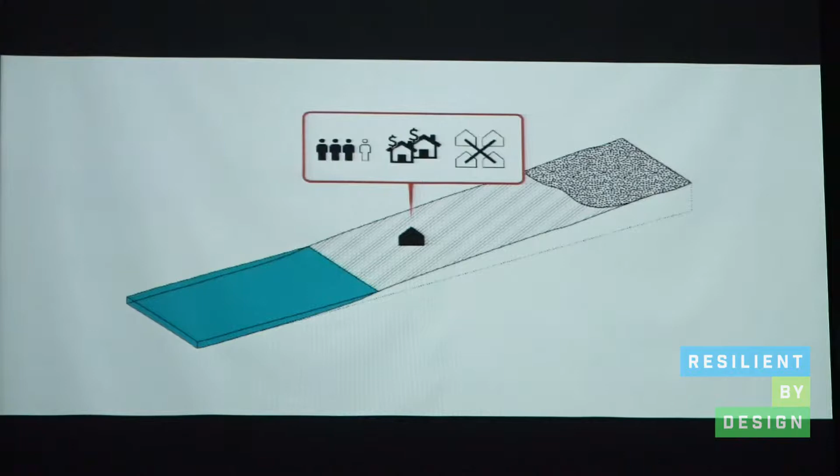The Bay Area is in crisis. When large groups of our neighbors can't afford to live in their homes, then the model for living in the Bay is broken for all of us. Many of our most vulnerable communities, those enduring poverty and structural racism, also live in areas that are highly susceptible to sea level rise and flooding.

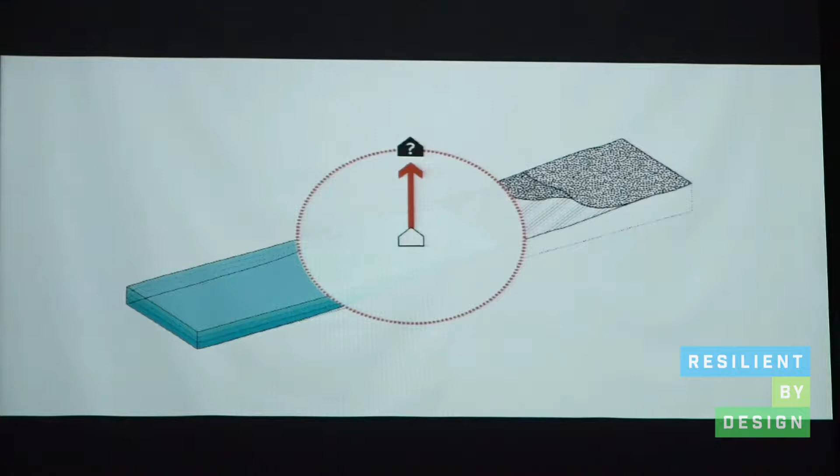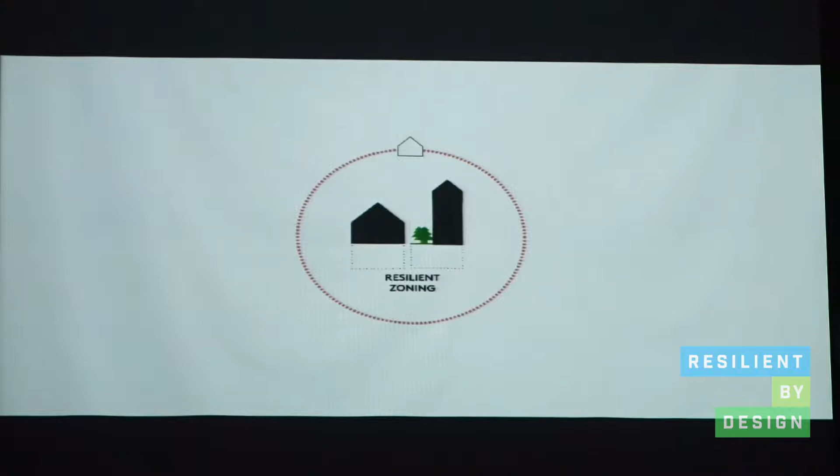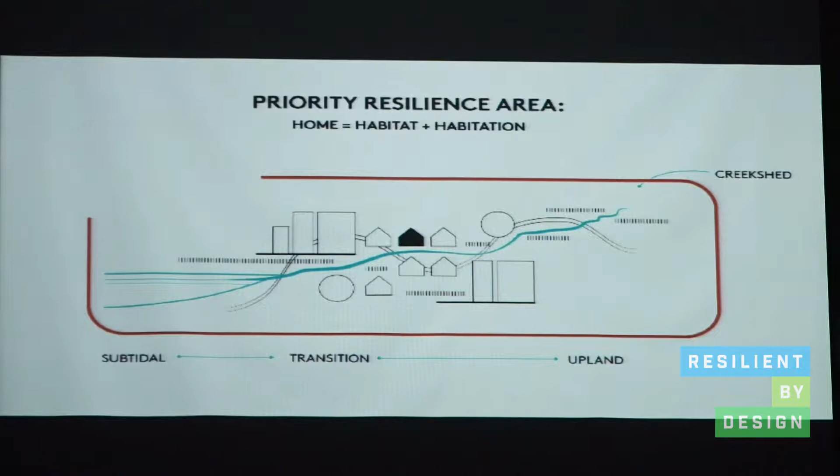We need solutions that allow neighborhoods to remain in place and thrive. We must produce more housing, preserve low-income housing, and protect residents from displacement, while improving the quality of neighborhoods for everyone. The home team proposes the creation of priority resilience areas, where new ideas of home emerge from a healthy and dynamic bay ecosystem. New regional patterns along the Bay Edge intertwine the health of the Bay and the health of our neighbors.

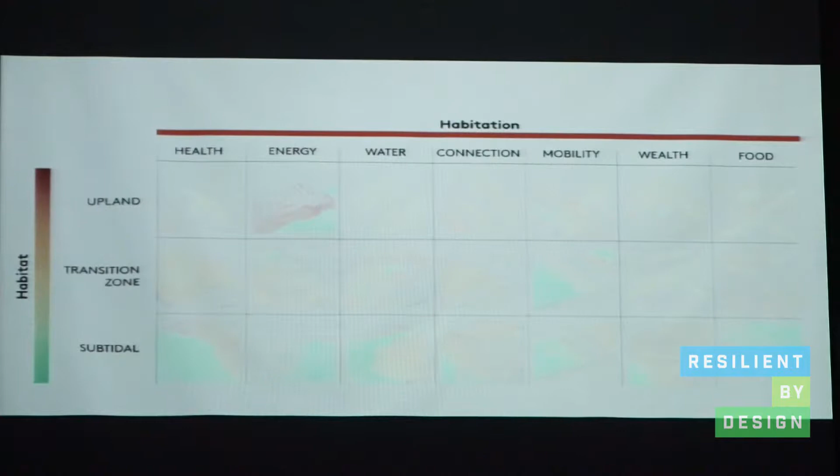Working in partnership with community members, we will use design as research to take on challenges and create opportunities for communities to relate, adapt, and thrive.

North Richmond is a place of historic racial inequity. African Americans who arrived in the Bay for the World War II shipbuilding effort were forced to settle in the low-lying area, cut off from other communities by railroads and infrastructure.

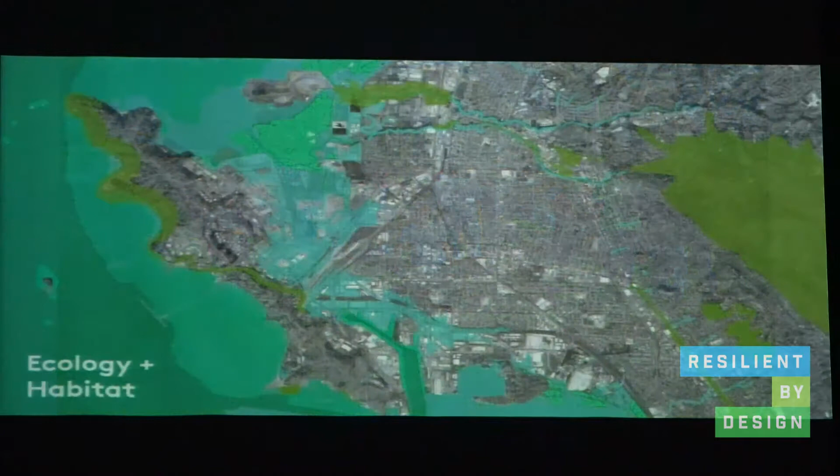The community is well organized, developing a North Richmond vision plan, programs at the Verde School, and greening projects with Urban Tilth. Green infrastructure and floating trails can address flooding while enhancing quality of life.

By improving walkability and bikeability to BART and the ferry terminal, residents can reduce commute times to re-engage with Bay nature at Point Molate as part of a daily routine. Horizontal levees and improvements to wastewater infrastructure open up opportunities to build new, permanently affordable housing.

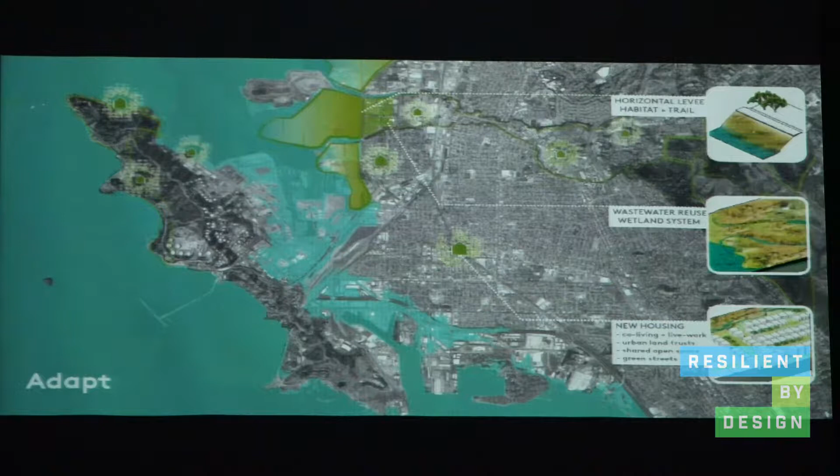The community and the ecosystem will thrive, catalyzed by an urban ecology business incubator that is a source of jobs, innovative housing, and a clean energy park on the site of the former landfill.

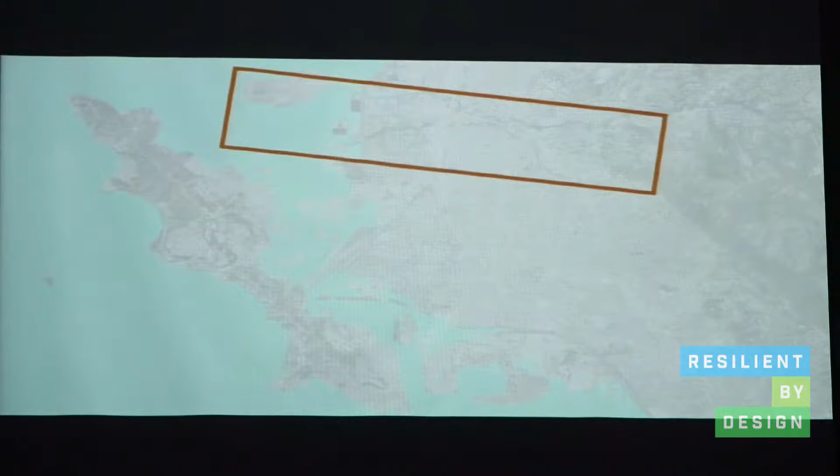In the near term, the North Richmond Water Reclamation Plant can provide treatment with constructed wetlands, allowing for pocket marsh connections that are healthier for the Bay Edge. As waters rise, the constructed wetlands transition to salt marshes to augment the Bay's estuarine habitat.

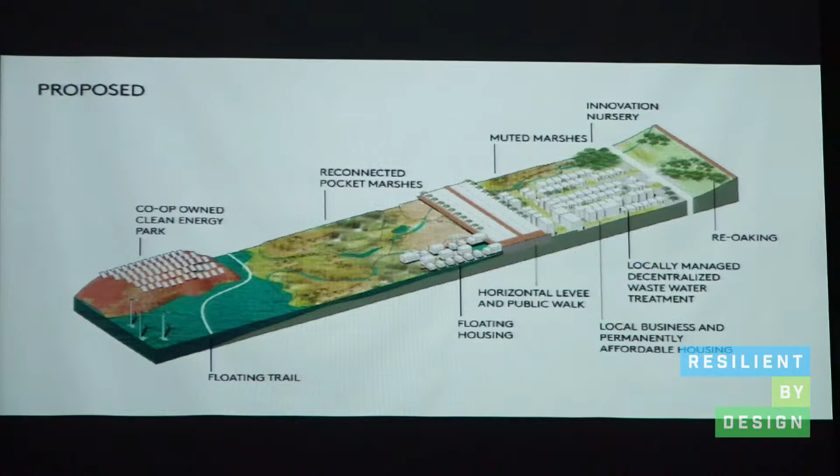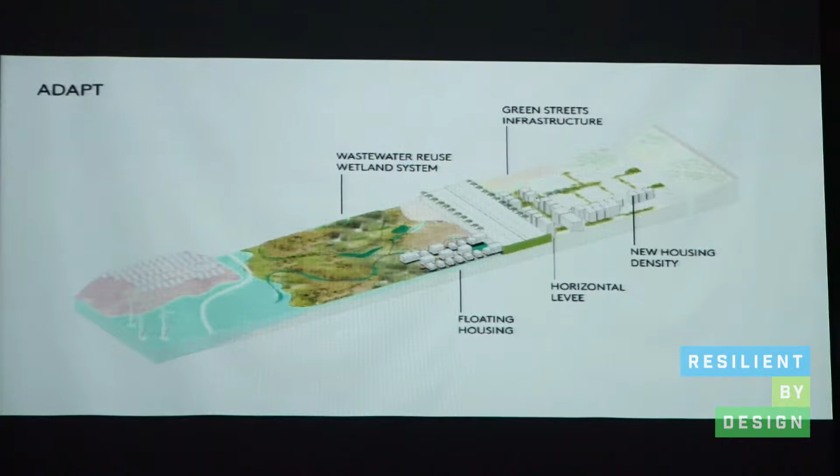Looking 20 years out, decentralized wastewater systems can be located in each neighborhood. These wastewater systems look like greenhouses open to the public. They can also process increased nutrients and return clean water to the Bay. As infrastructure is relocated to inland conditions, the waterfront is freed up for new floating housing and ecological restoration.

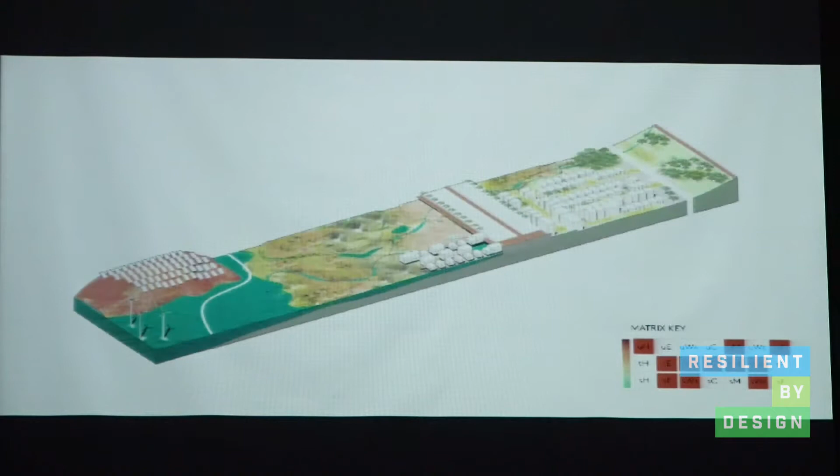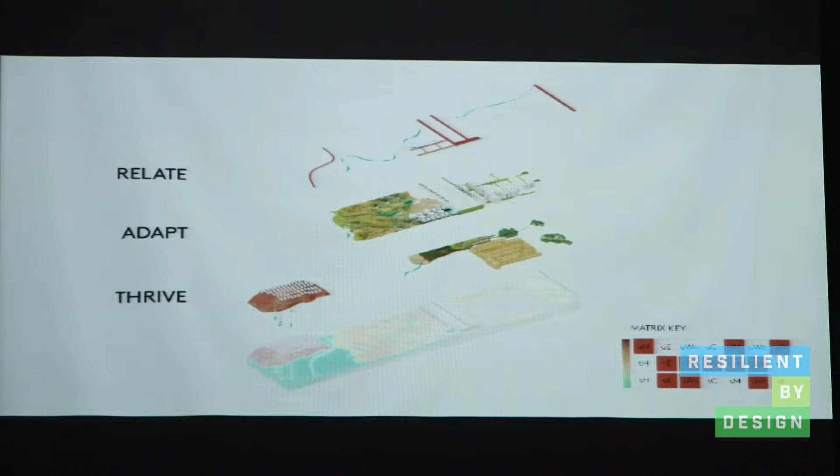Students from Kennedy High School in Richmond have shared visions of healthy food, floating homes, rooftop gardens, and multimodal transport. Stacking funding sources for ecology, wastewater, and health can support this neighborhood transformation, a priority resilience area in North Richmond.

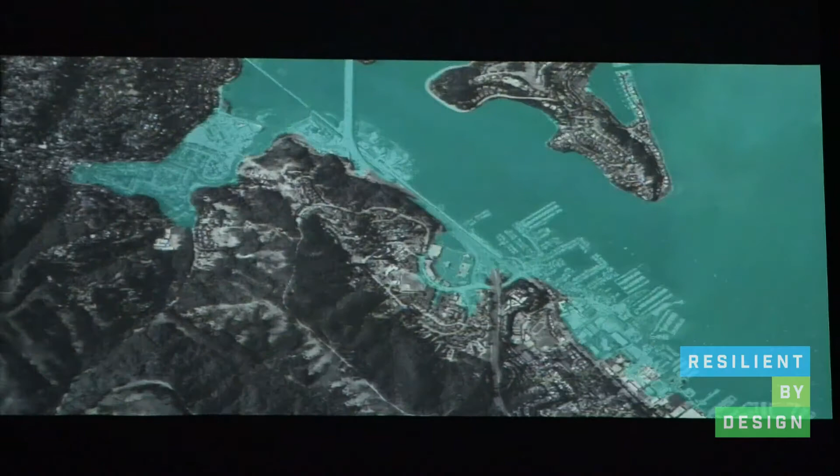Marin City residents are well organized and tight-knit, yet constant flooding and deep health disparity highlight inequity within one of the nation's most affluent counties.

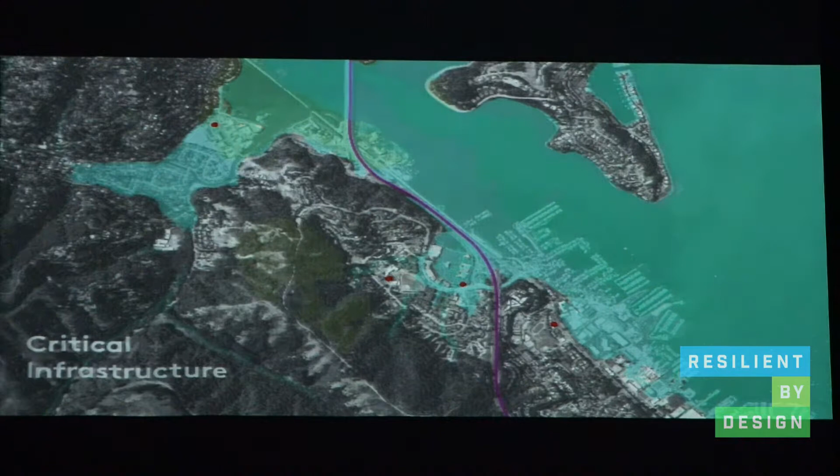Improvements to Highway 101 can mitigate its regular flooding and catalyze positive change in Marin City. However, it is essential that the existing residents not be displaced. People here have experience with things not working out in their favor. New economic models need to come first for producing, protecting, and preserving housing.

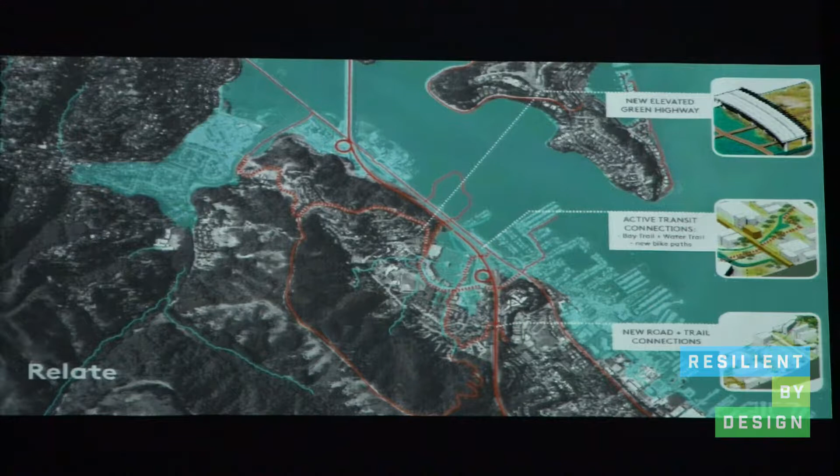We propose elevating the low-lying portion of Highway 101 to provide a critical second access point to Marin City. A new horizontal levee and marsh areas will adapt to rising water while supporting new affordable houseboat cooperatives. Proposed creek restoration and street retrofits with green infrastructure will help reduce upland flooding.

The community thrives as new housing and jobs come to Marin City, and a community reinvestment fund directs revenue to support projects with community benefit, such as an enhanced community center and a community-owned clean energy microgrid.

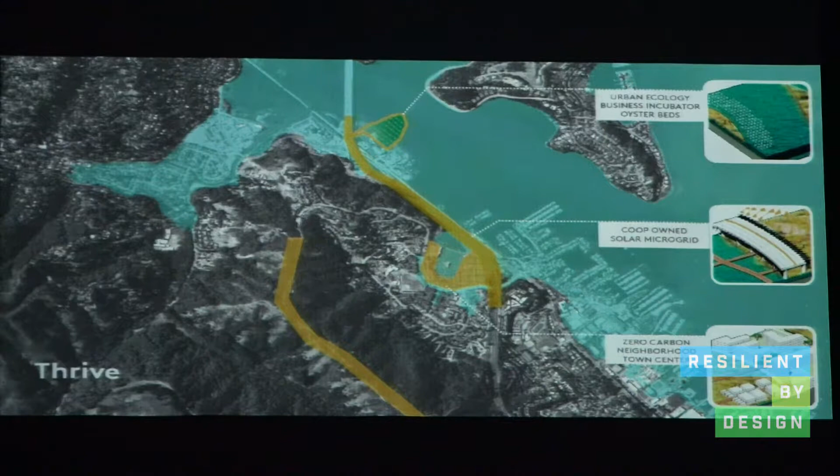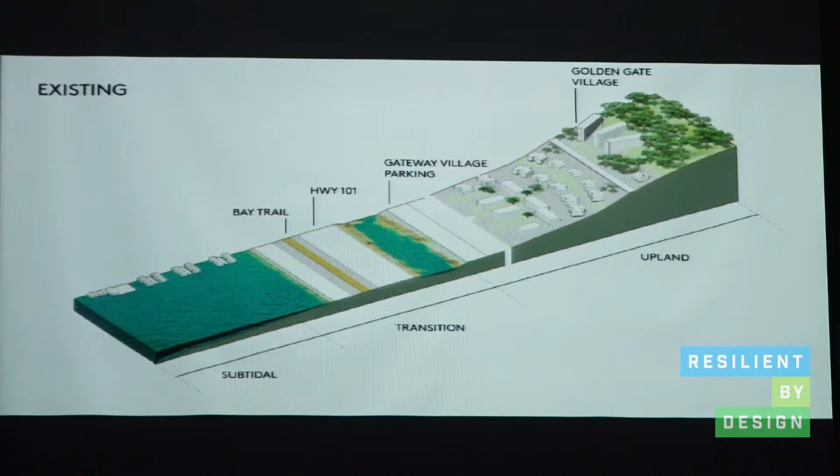In the short term, the highway median can be redesigned for flood control and provide an immediate response. A raised bay trail can be designed to be part of a new horizontal levee that phases into tidal marsh as sea level rises. In 20 years, an elevated Highway 101 and a reconfigured shoreline support development of a new mixed-use center.

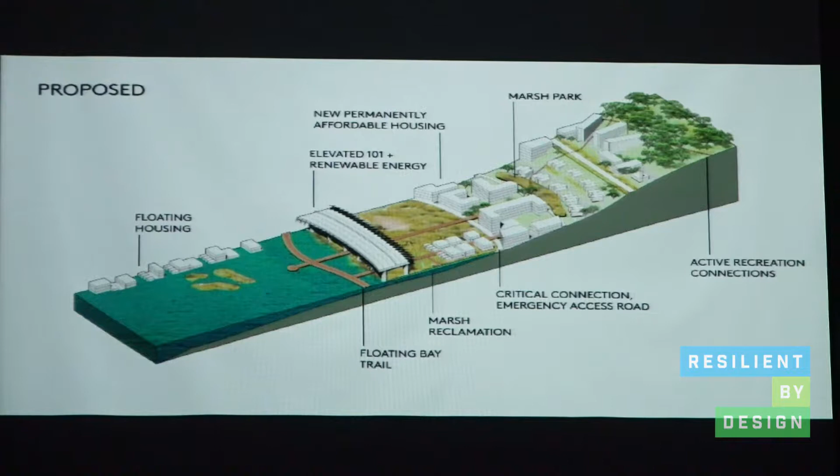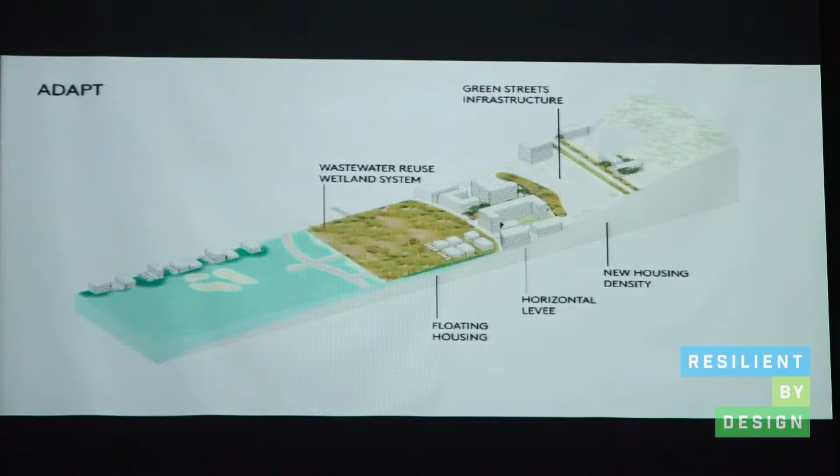This mixed-use center provides jobs, healthy food, and permanently supported affordable housing along a living shoreline, with houseboats and a new expanded tidal marsh. Residents, hikers, bikers, and tourists use new trails and floating bridges to move easily between Sausalito, Tam Valley, and Marin City.

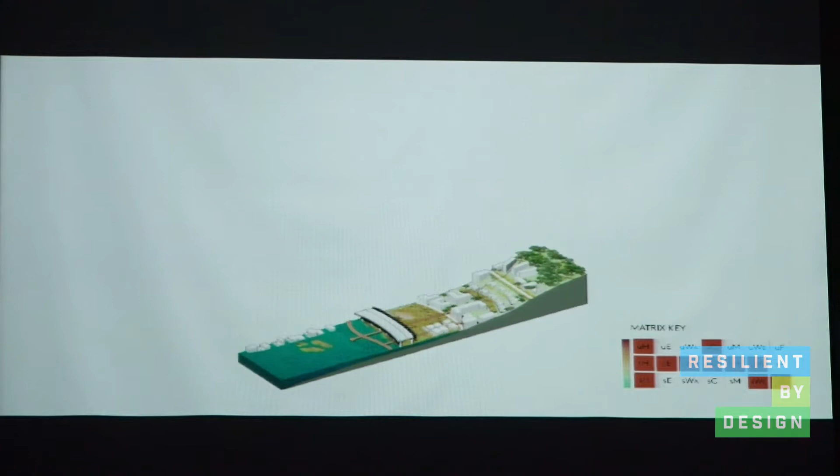Resilience investments are a catalyst that can include many co-benefits, such as space for a flea market every Saturday in a new floating town square in this priority resilience area in Marin City.

Neighborhoods in East Oakland have motivated community organizers with adopted master plans for San Leandro Creek and Arroyo Viejo and a strong citywide resilience plan.

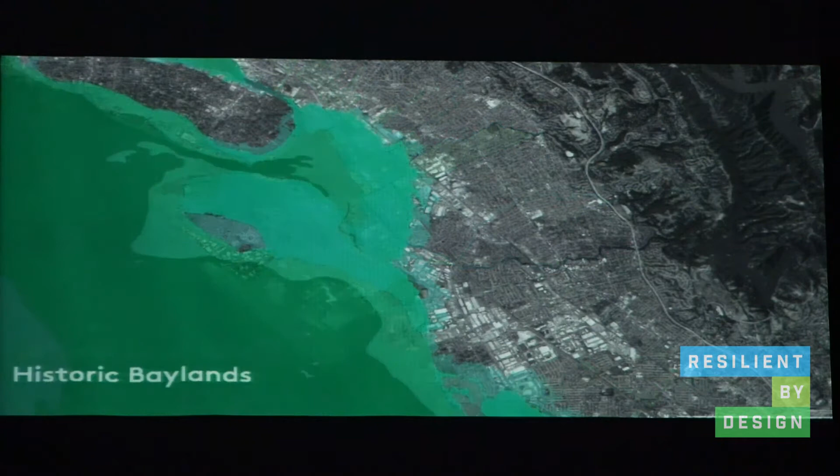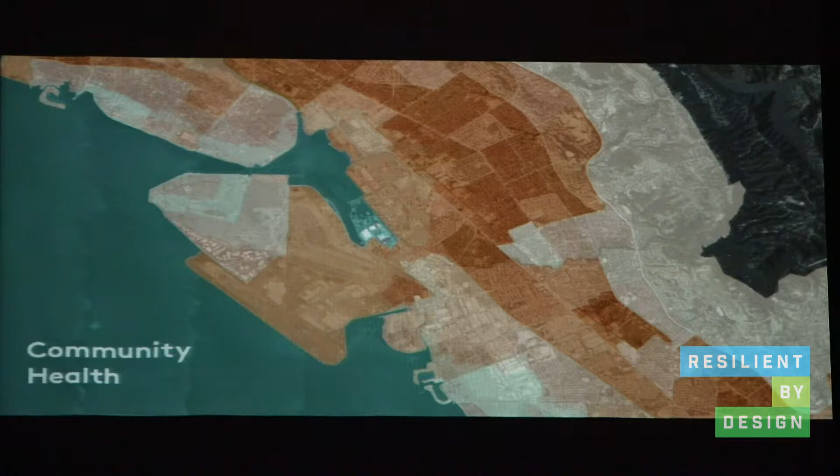But the challenges of racial inequity are clear. Between 2003 and 2013, a young black man in Oakland was as likely to be killed in gun violence as he was to be prepped for college. Our team is committed to a process that recognizes the urgency in that disparity.

When we walked Arrowhead Marsh with the community members, we heard that they would like to use the park more, but getting there was frustrating and unpleasant. Trails along the creeks can connect people to Lake Chabot and the Bay Area Ridge Trail along the new East Bay Greenway, making it easy to be healthy with places to walk, bike, or visit with family and friends.

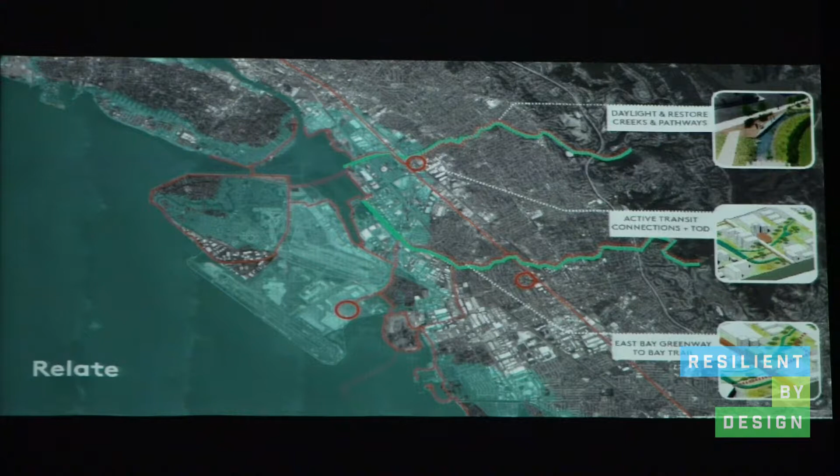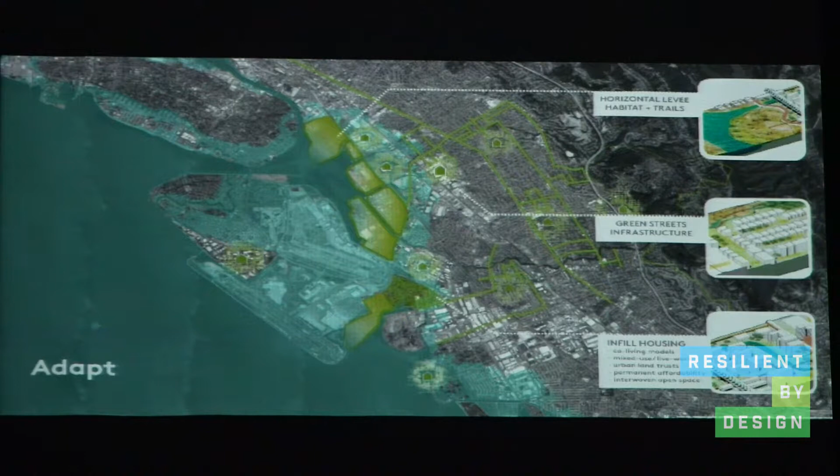Adaptation can occur as the Bay Edge is restored, with transfer of development rights and community land trusts supporting development of permanently affordable housing for a mix of incomes, including the missing middle, in mixed-use neighborhoods that include local jobs and access to healthy food.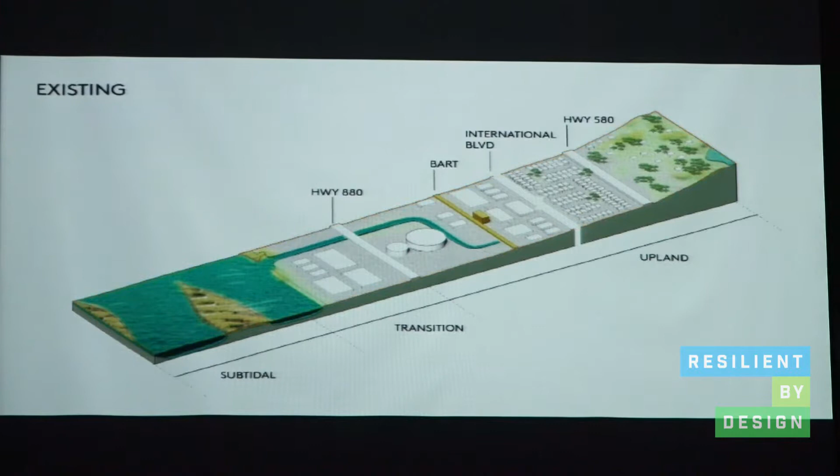A community-based clean energy microgrid, a decentralized wastewater system, and transit accessibility could contribute to more inclusive neighborhoods with shared wealth building. A 20-year vision includes a horizontal levee along the 880 freeway, protecting that essential transportation asset while creating a valuable site for mixed-use, mixed-income housing that supports estuarine life with migrating marshes behind the levee.

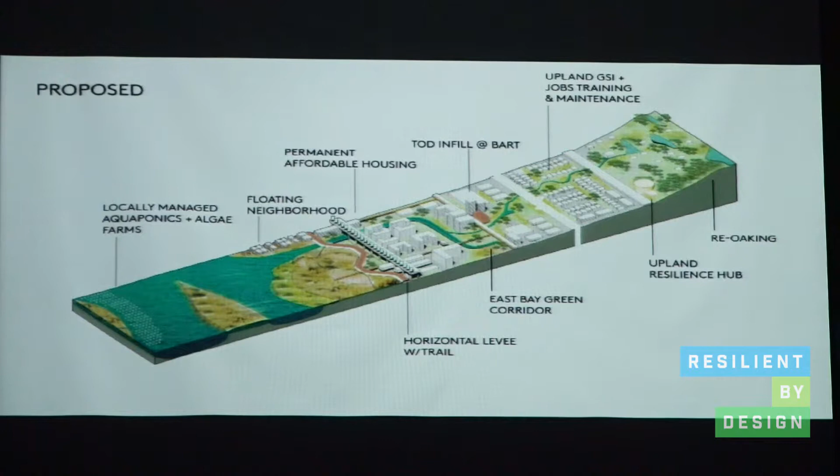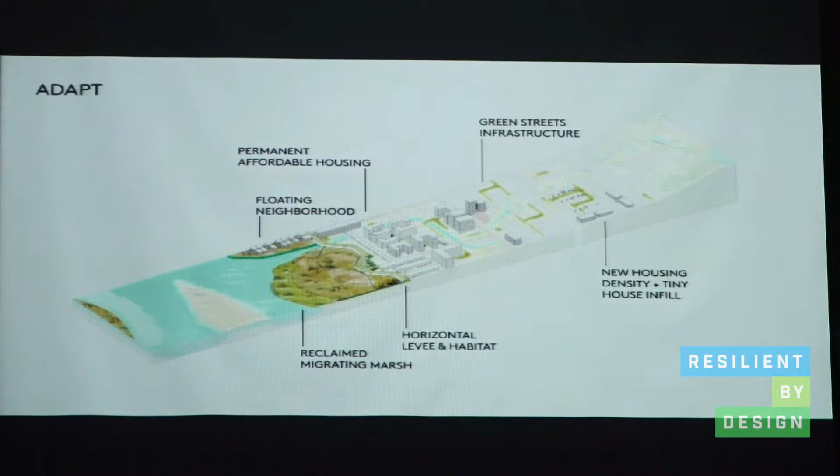From day one, the trail system can be the framework for mitigating upland flooding with rainwater collection along the creek, in neighborhoods, and along arterials to slow flooding. Opportunities to daylight creeks can be combined with new housing that supports a thriving riparian ecosystem.

Investments to improve the site ecology will be made to maximize community benefit while catalyzing development of new, healthy, mixed-income housing in this prime transit-accessible priority resilience area in East Oakland.

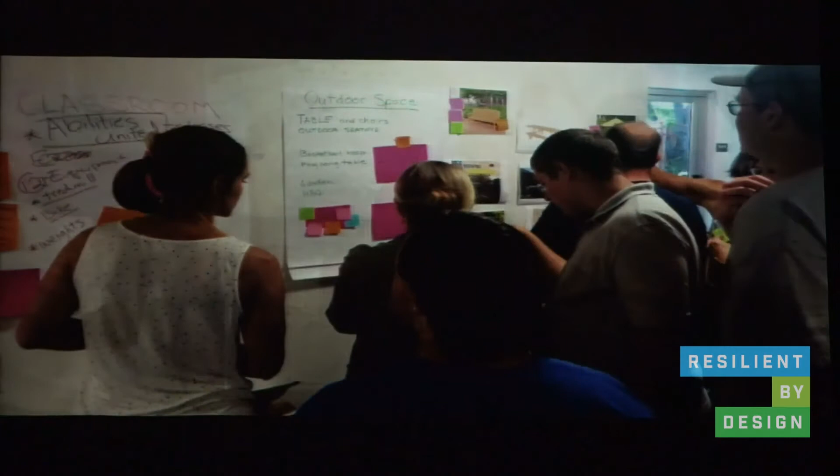No one is better at defining and mapping assets and liabilities than community members themselves. The Streetwise app will be an important tool for residents to highlight strengths and barriers from their perspective.

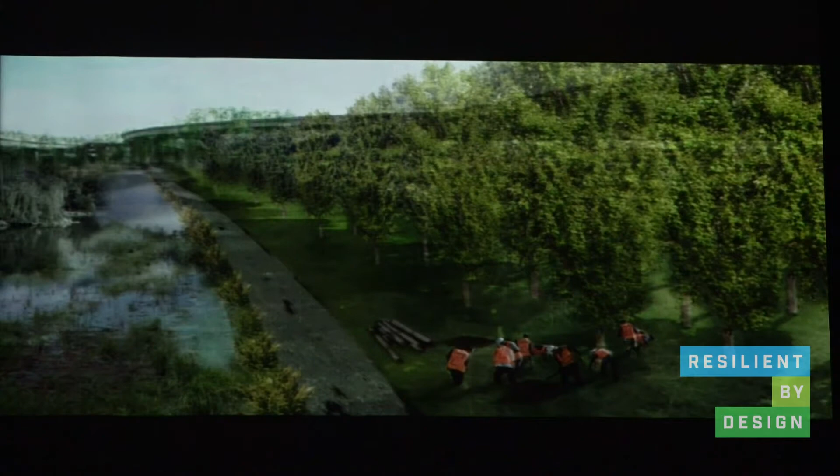Our work with the community will also include prototyping, the piloting of community-driven ideas initiated at relatively low cost, developed in partnership with educational institutions, and can jumpstart the transformations. We look forward to working with the neighbors to hear the stories, understand the hopes, and collaborate on design that strengthens the foundations of home.

Through this collaborative research process, it's been so rich over the last several months. Our team has gained a deeper understanding of the broad scale and multifaceted capacity of the challenges ahead of us, and really put the work we do in urban design and sustainability in a much deeper and more grounded context.

Like so many of the other teams, we engaged in a very involved mapping process, which revealed a series of critical hotspots as we saw them. Shown here on this map is an outline of some of the potential priority resilience areas.

We see the need for interdependent and bioregional based solutions that address these regional connections, but ultimately happen at a local scale. The question we ask continually is what is that scale, and what's the sweet spot between the local neighborhood and the region? We feel it is this creek shed.

Shown on the map there are probably 18 to 20 or so sites where there's high potential for replicability among these new, what we're calling the priority resilience areas.

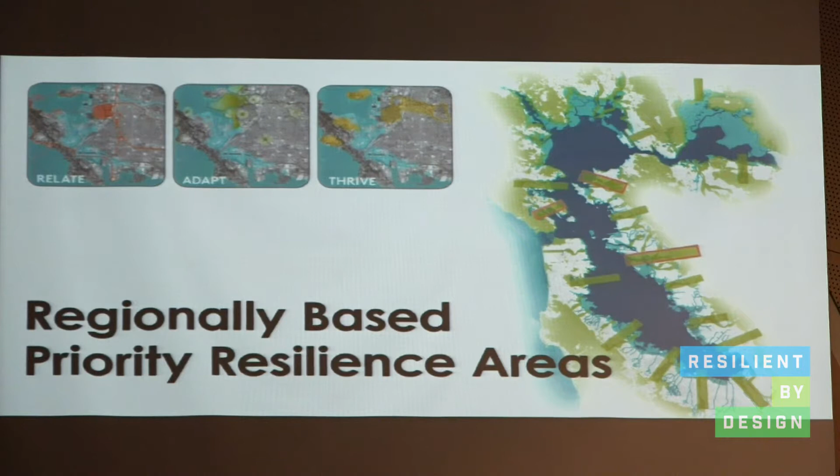Taking it a bit further, the strategy of Relate really pertains to connections across boundaries, so this is transit and pathways. The strategy of Adapt pertains to new land use patterns, including home interwoven with ecology. And the design strategy of Thrive is really about equitable business models, so new land trusts and cooperatively owned district systems.

Key for our team, and so many have spoken about it today, is that we must start with these communities who are most vulnerable, and not just because it's the right thing to do, but because there's a fascinating overlay of lever points as we see them that could become the catalysts for broader change across these PRAs.

This investment opportunity is a chance to look at problems and posit that they are actually the points of the solution. So often the barrier that's the freeway, the raised divided highway, or the polluting refinery plant can be reimagined on that site in that community for direct community benefit.

We see this healing gesture of subverting the legacy of environmental injustice as really critical. We heard this echoed by the North Richmond students when we brought them to our office to do design workshops. They were most excited about green streets and ideas of growing food on vacant lots, reimagining the adjacent refinery into clean energy in their backyard.

We see this home opportunity as a way to really elevate the best practice in the housing industry. SPUR and other groups constantly talk about the preservation of existing affordable deed-restricted units, the protection from gentrification and displacement, and then producing more housing so we can build our way out of this immense deficit in the Bay Area. But it's also to couple that with how are we building, and what exactly does that housing look like, and what are the new forms that have yet to be really market tested?

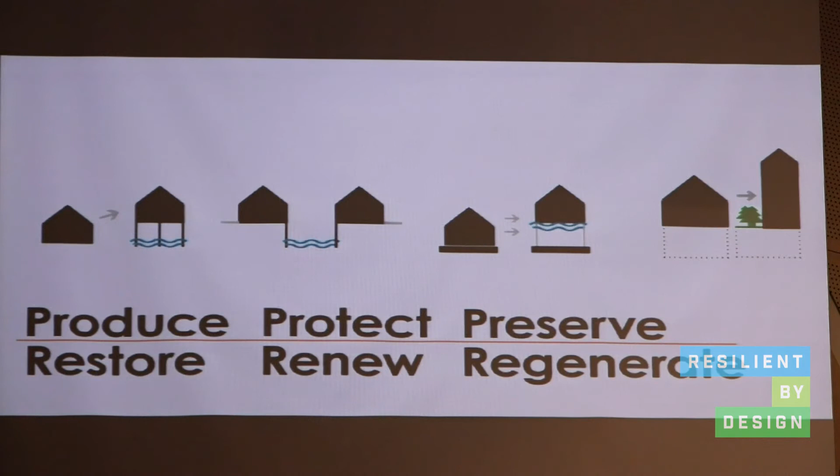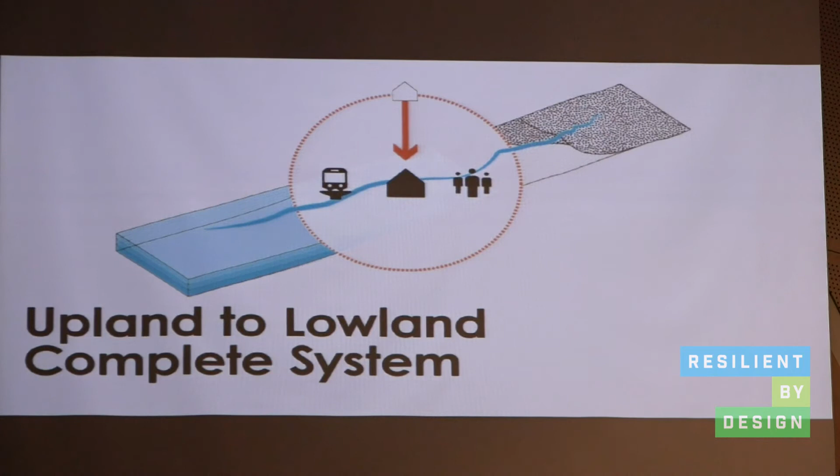Ultimately, this is for us about adapting in place and ensuring that the dynamic, changing cities, which are always happening around us very quickly, don't lose a sense of home and a sense of place as this occurs.

The habitat and habitation matrix that we developed really as a generative tool became so much more, and that home is the true synthesis of these two. It's the blending of creation of habitat for other species alongside our own human habitation needs.

We're really excited to get into the details of what some of this looks like, thinking of floating housing pier structures, which double as reef and biomimicry habitat for critical indicator species in those particular ecosystem districts.

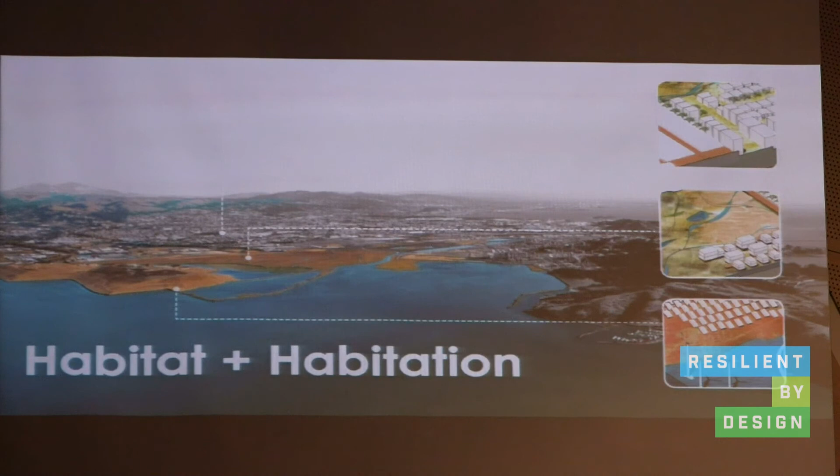Ultimately, the process is going to be long and hard, and it has to include capacity building among agency and among stakeholders and the community itself that we're working with. We're talking about 3 years, 20 years, and 100 years. So we know that the process is as important as the outcome going forward.

With that, we're really optimistic. We see just so much wealth of ideas and opportunities and stacking of co-benefits going forward. Thank you to all of the stakeholders through this process who have brought so much to the table. We're truly standing on the shoulders of giants to move this forward. We look forward to it. Thank you.